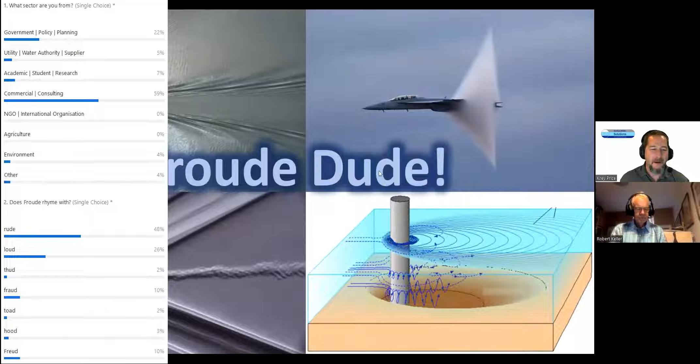So I guess one of the things I did want to mention about the poll results: first, the pronunciation of Froude - is it Froude as in rude, or Froude as in loud, thud, fraud, toad, hood or Freud?

It looks like most people are going to say Froude. That's how we pronounce it today, but we do have a Frenchman on board who may pronounce things a little bit differently. Also, I wanted to get a feel for whether you're familiar with a lot of the terms we'll be covering in this webinar and some upcoming webinars.

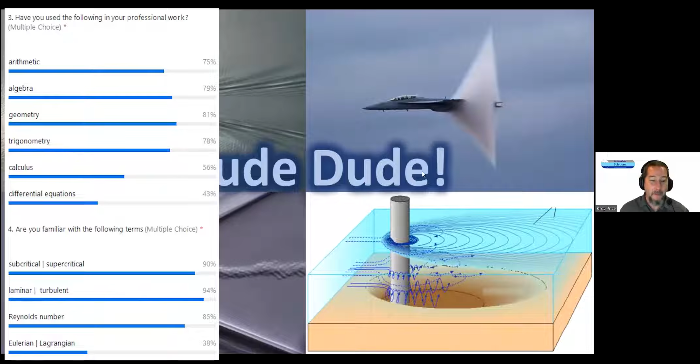It looks like there's some pretty good coverage of those terms, and a lot of people have actually used some of their math skills in their work, which is more than I thought - people are actually using calculus in their work. I have to admit, it's been 20 years of water modeling, and I have not yet done a differential equation.

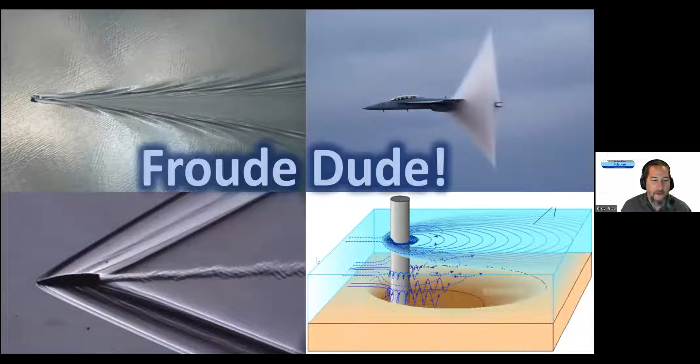So let's dive straight into our topic for today, which is Froude and the Froude number. Now I've got a few analogies shown here: a ship wake, and we'll hear from Hubert momentarily about how Froude was actually a naval architect, and how a ship moving through water behaves like a bullet moving through the air or a supersonic jet, and how that all relates to a bridge pier and a moving medium.

So we've got sometimes mediums that move, and sometimes it's the object that moves within the medium. What we're doing with this topic today is introducing one concept, the Froude number, but we're trying to give you a feel for how our upcoming courses in May and June are going to play out. We're going to address a whole lot of different terms in those courses, and take them all back to first principles.

How does water behave, like Newton's experiments here, and momentum and energy? How does gravity come into play? Hubert will mention in our equation today, you'll see gravity in there. What would happen if you took some of these models out into space? If you've seen the movie Passengers, they studied this intensely as far as how water would behave without gravity, and they used some of the International Space Station experiments to see how surface tension would keep it together.

And what would happen if you took your model out into space and then put it into a space elevator and accelerated it at 9.8 meters per second squared - it's the same thing as you would have here on planet Earth. So we're going to try and take all these things back to basics, to first principles.

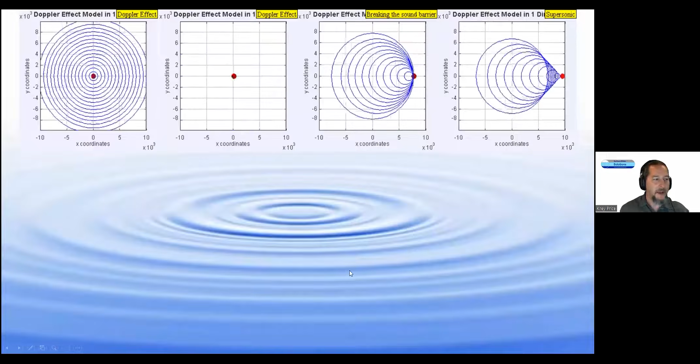And one of the things we're also going to talk about a little bit today is analogies. These are Wikipedia animations from the Doppler effect, and we all know that has to do with sound. But what does this have to do with water? Well, if you imagine a ripple of water and how fast that ripple travels, that's what we're talking about today.

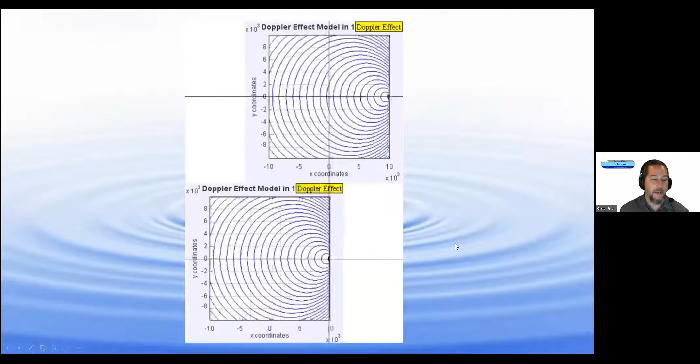And so if I took that same Doppler effect, and instead of moving the object through the medium, I keep the object where it is and move the medium around that object, it really ends up being the same thing, and your perspective can come into play there as well.

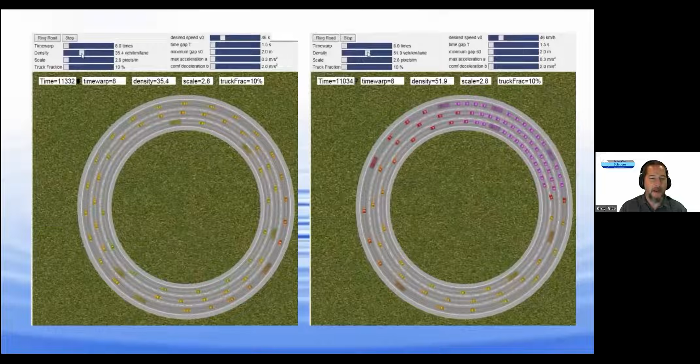Now, we all have analogies every day that we deal with. Are we dealing with subcritical or supercritical flow on the road? Are you guided by just the traffic around you? Is this laminar flow? Is it turbulent? Are you dealing with backwater effects and waves from the brake lights that move up towards you? There are analogous systems all over the place.

One of the ones that's most familiar - and we'll hear from Hubert about some weirs out there where we have some supercritical flow - which direction can information move in? Can this fellow who's trapped in this vortex splash a message up to somebody standing up on shore here and send a wave upstream?

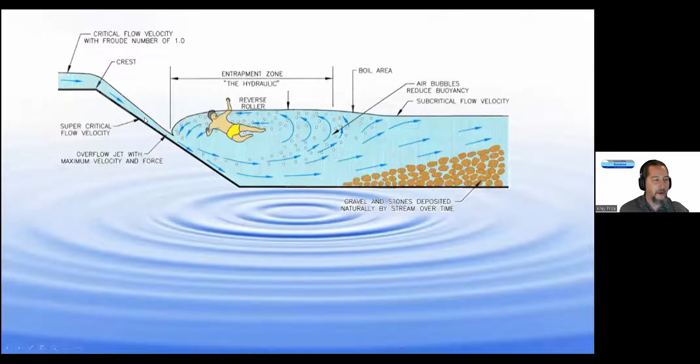That's what we're going to talk about today: which direction can information travel in?

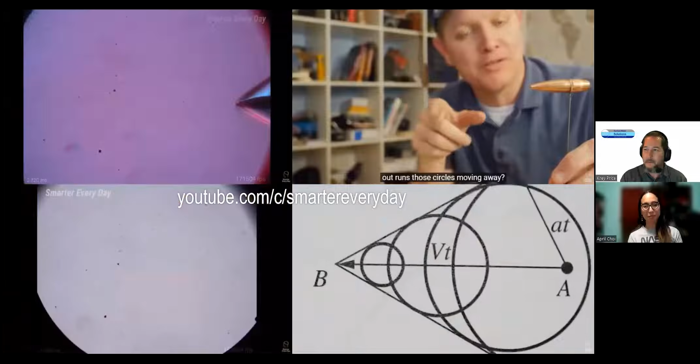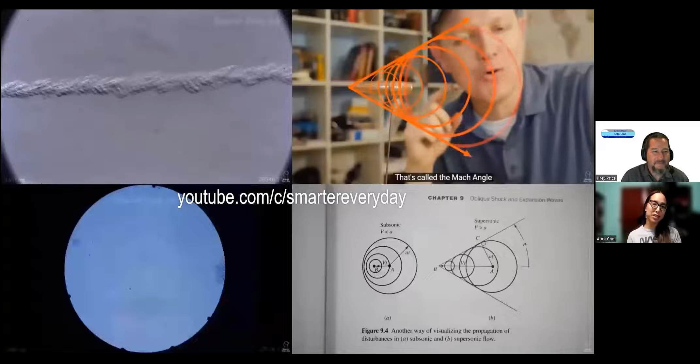So we got two episodes, one about bullets in the air and another about whip cracking. I had the wonderful opportunity to work on an experiment with Destin from Smarter Every Day on Schlieren imaging, which is specifically how you view pressure variations in the air, using a technique developed by Toepler, where you can see the densities of the air translate.

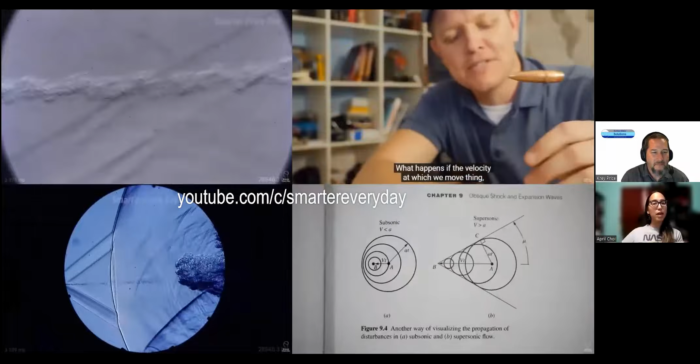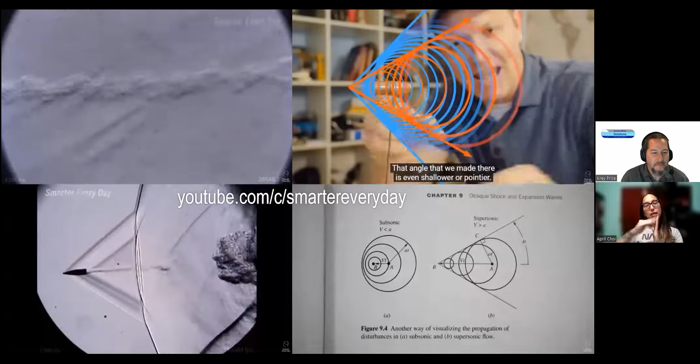As Kray was saying earlier, you have a natural propagation of pressure waves that would occur in water as it oscillates up and down, or as sound travels away from an object in a medium of air. In the instance of a bullet, we have something referred to as the Mach number, similar to the Froude number, in the idea that once you reach a certain point—in this case 1, since it's a dimensionless number—there's an amount of propagation that can occur forward as well as sideways.

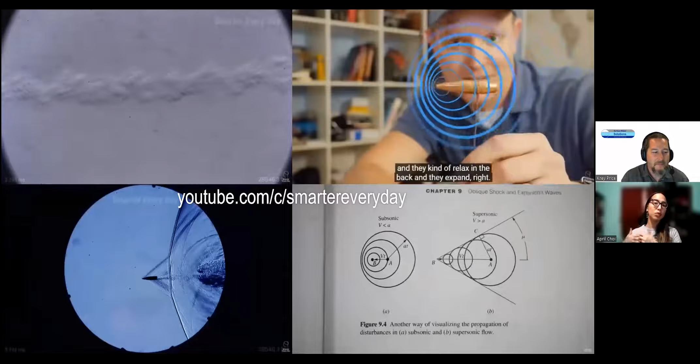As these waves try to propagate sideways, or up and down in the visual frame of reference, you can see in the lower left that a supersonic bullet will actually travel faster than the propagating wave that travels at the natural speed of sound. This is how you get that supercriticality, or a Mach number higher than 1.

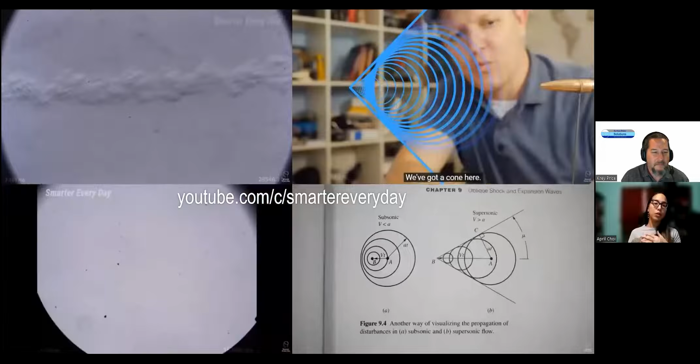In the lower right-hand corner, you can see what happens when you go from a transonic flow, which allows some areas to be supersonic and some not, to breaking the sound barrier, what a lot of people refer to, creating this Mach angle coming away from the tip of a bullet.

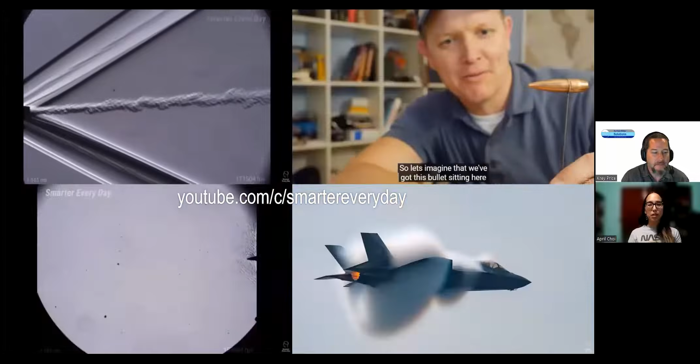So I flew down to Mississippi to help with imaging, where you can see the flow of a bullet through air, and then my big passion in whip cracking also got utilized to be able to actually see the development of a shockwave coming off of a whip.

We actually got to see the wave propagation down the whip, as well as using that Schlieren imaging I spoke of to see the bow shock development coming off of that whip, so you can see how that whip is moving.

One thing we also got to see was the different pressure variations, actually seeing the development of a denser air bow shock in the front, as well as dissipating toward the back end.

This was an incredibly fun experiment, where we also talked about the Eulerian-Lagrangian framework—whether you take the framework and look at the object you're tracking. So if you were just standing looking at a bullet, for example, versus driving in a car in traffic, versus standing on a bridge pier watching traffic flow below you, it concentrates on whether you're the object itself or the flow field around you.

So one question for you: when I'm at the gym and I use the battle ropes, how come those don't crack?

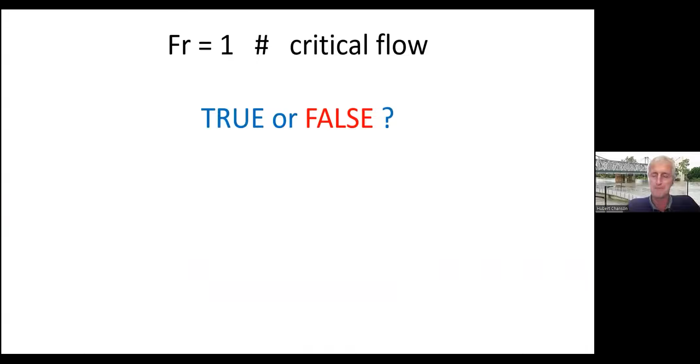So I will start by asking you two questions. The Froude number equal unity means critical flow condition, true or false? And the Froude number is derived from energy considerations, true or false? Think about it, and we'll come back to this question at the end of my talk.

The Froude number is a dimensionless number that is linked to gravity effect and is often defined as the ratio of the velocity scale divided by the square root of gravity acceleration times length scale. It is named after an Englishman, William Froude, who used this dimensionless number in the 1870s.

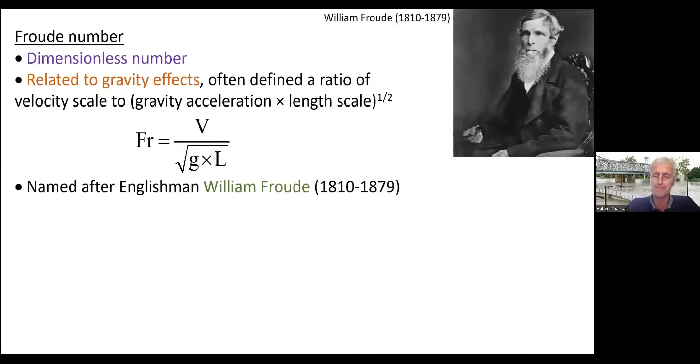But in fact the dimensionless number was first introduced by a Frenchman, Ferdinand Reech, who was a French naval academic, and used this dimensionless number for the testing of ships and propellers, introduced first in his lecture notes in 1832 and later published in 1852.

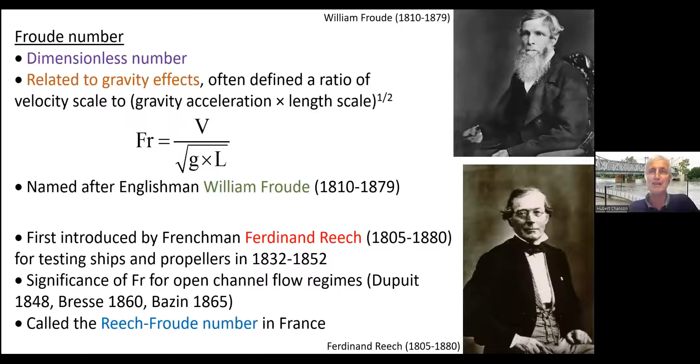Interestingly, about the same time, a number of hydraulic scholars in France recognized the significance of this dimensionless number in relation to the various open channel flow regimes. And in France, many textbooks refer to this number as the Reech-Froude number. Indeed, when I was taught at university, I was taught about the Reech-Froude number.

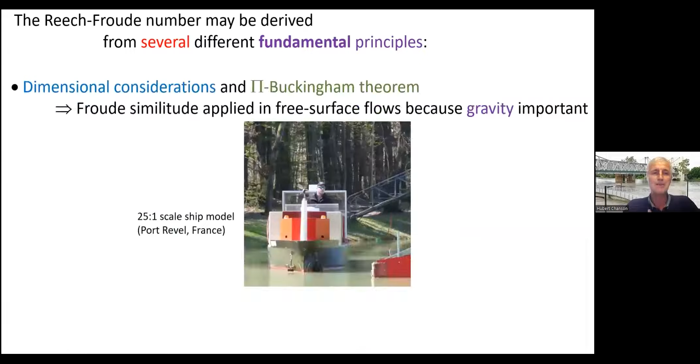Maybe first, one of the key takeaway messages this morning: the Reech-Froude number may be derived from several different fundamental principles, all of which are theoretically correct. It may be derived based upon dimensional consideration, using, for example, the Pi-Buckingham theorem, because gravity effects are always important when modeling free surface flow.

You see in front of you a picture of a 25:1 ship scale model. Don't be fooled by the scale, this ship model still weighs between 5 to 8 tons. We may also express the specific energy in a dimensionless form and derive critical flow condition for minimum specific energy, following the work of Boris Bakhmetev.

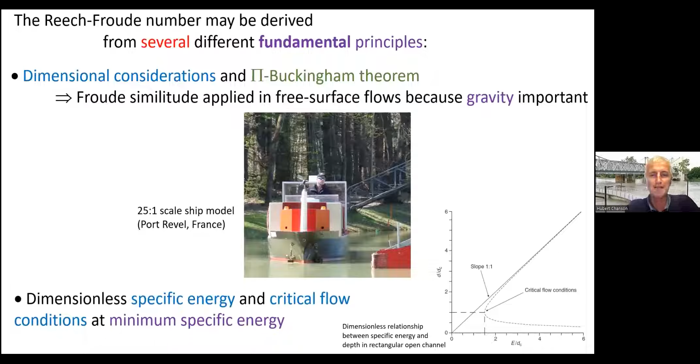We may also derive the Reech-Froude number from momentum considerations, either from an integral form, such as the Bélanger equation, or from a differential form, such as the Navier-Stokes equation. The Bélanger equation applies to hydraulic jump in horizontal, smooth, rectangular prismatic channels, and was first derived in 1841 by another Frenchman, Jean-Baptiste Bélanger.

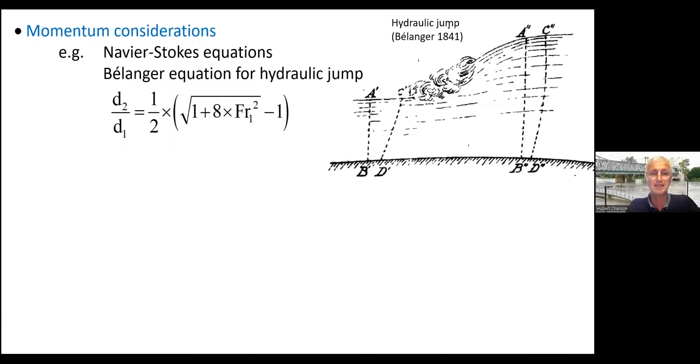We may equally derive the Reech-Froude number based upon energy considerations, either in an integral form or in a differential form. Many of us today will be familiar with the differential form of the energy equation, called the backwater equation.

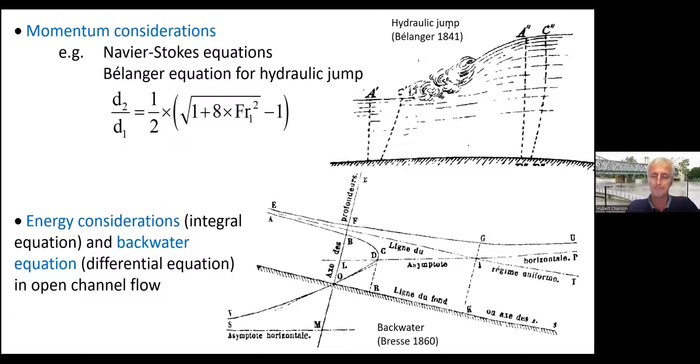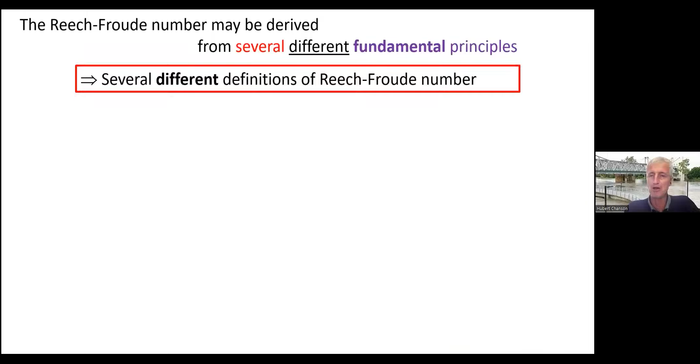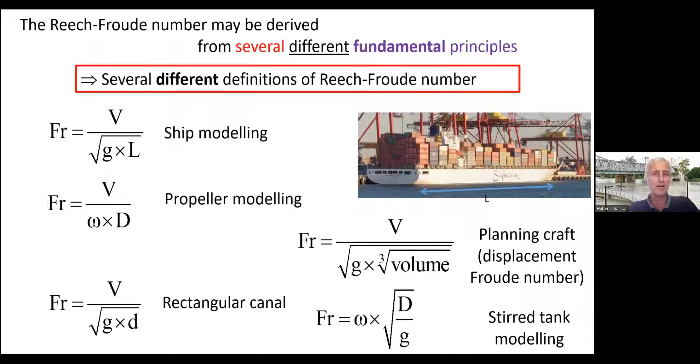Maybe the second key takeaway message today is that since the Froude number can be derived from several different correct theoretical considerations, there are in turn several different definitions of the Froude number. In front of you are 5 different definitions, and I know at least 3 to 4 other definitions. So as hydraulic engineers and fluid modelers, we need to ask ourselves, which one is correct? Which one should we use? How do we define the Froude number?

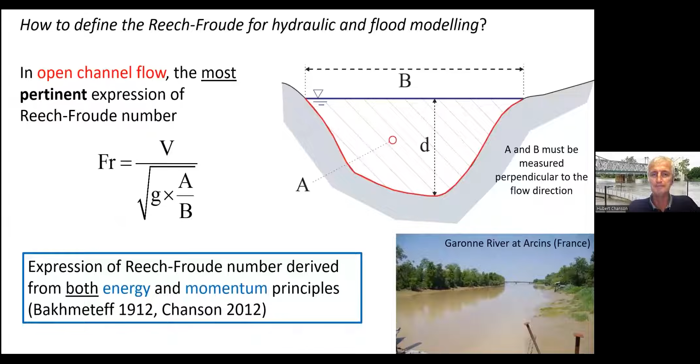Interestingly, this definition can be derived from both energy and momentum principles. With this definition, and only with this definition, the Froude number equals unity at critical flow conditions, when D equals Dc, the water depth being equal to the critical depth.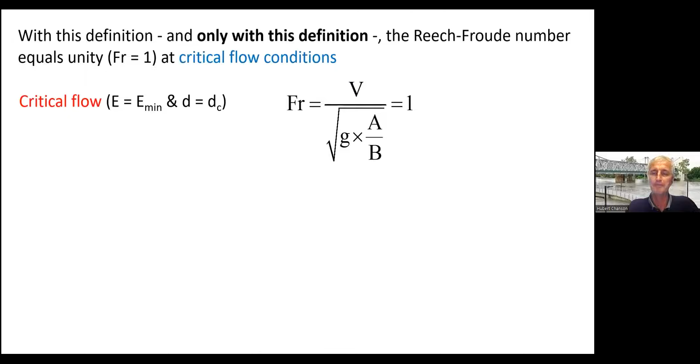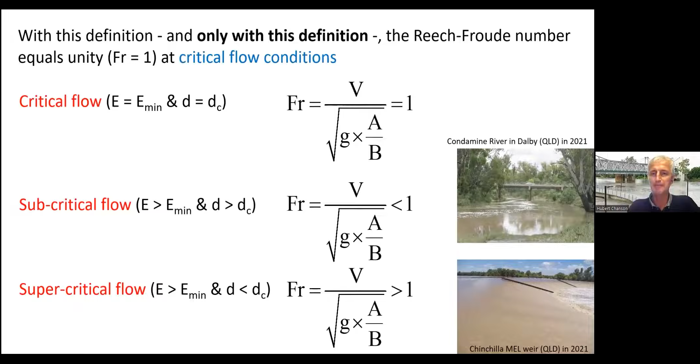When the water depth is greater than the critical depth, that is when we have subcritical flow, this Froude number definition will be less than unity. And when the water depth is less than the critical depth, that is supercritical flow, this Froude number will be greater than 1. The concepts of critical, subcritical, and supercritical flow are essential in open channel hydraulics.

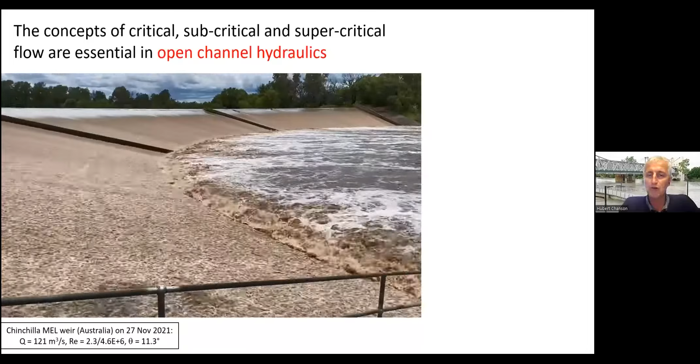I'm playing a video, and I hope you can see it, of a spillway operation in November last year in Queensland, with subcritical flow in the tailwater condition, a hydraulic jump, supercritical flow down the steep chute, and critical flow condition at the spillway crest.

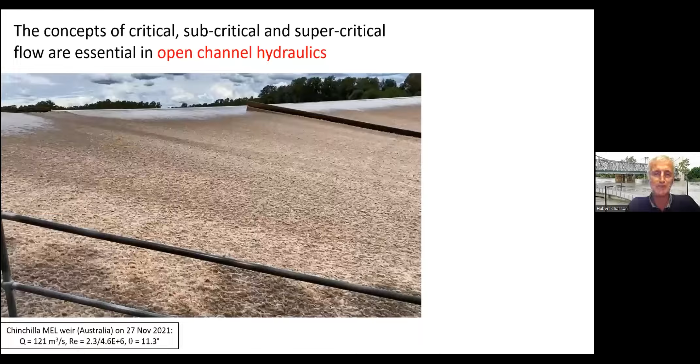This particular video was observed at the beginning of the flood. Two weeks later, this dam was completely overtopped, and on the right, the two photographs illustrate the high water level, and my car would have been completely submerged at the time.

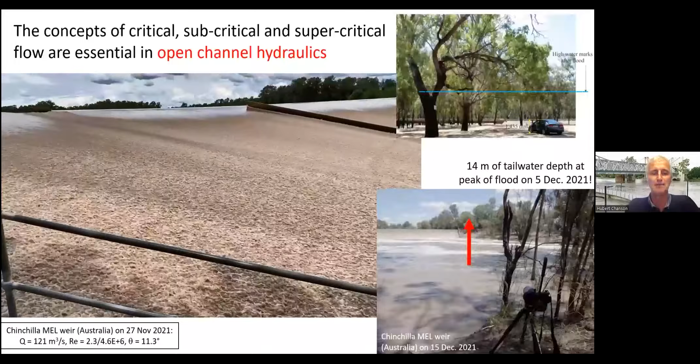So coming back to the two key questions at the start of this talk: does a Froude number equal to 1 mean critical flow condition, true or false? The answer is false, unless we use a definition of the Froude number as shown here, using the ratio A over B as a characteristic length scale.

The Froude number is derived from energy consideration, true or false? I will say partially true, because we can derive the Froude number from momentum consideration as well as dimensional consideration.

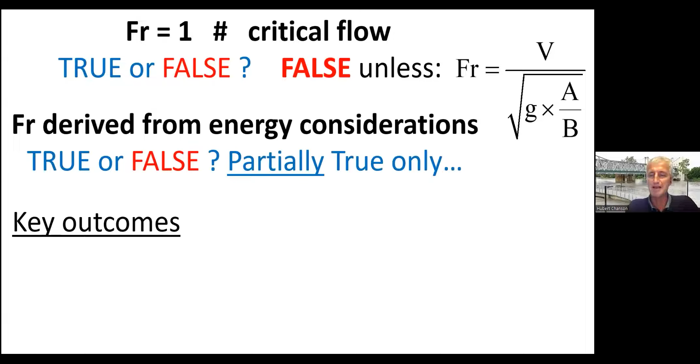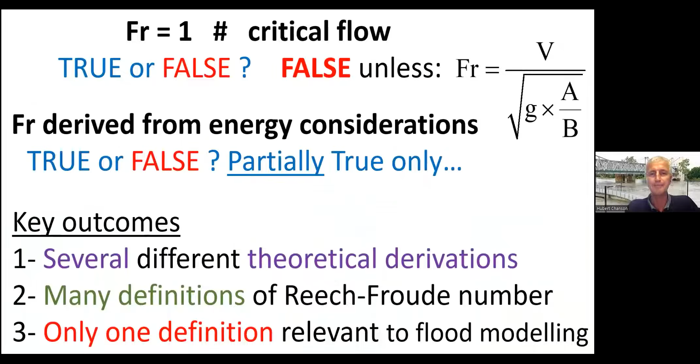For those interested, there is a number of bibliography references that you may wish to check. Thank you very much.

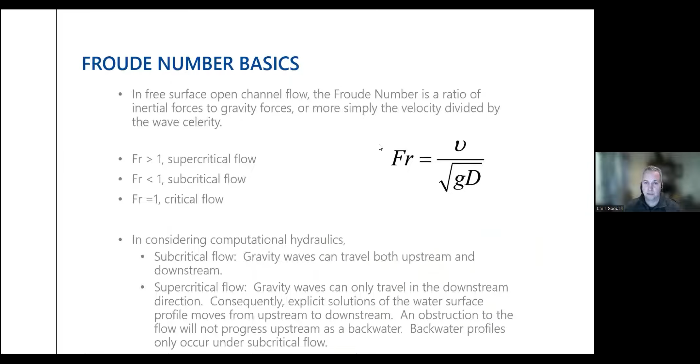In stream modeling of natural streams, we generally don't think about the Froude number too much. That's because most natural streams flow under a subcritical flow regime. However, understanding Froude numbers and noticing when they get close to 1 or even greater than 1 in your results can indicate problems with your modeling inputs.

N values may be too low, which could drive your depths down below critical depth into the supercritical realm when maybe it shouldn't be there. Computation nodes may be too far apart, either your cross sections are spaced too far apart, or in a two-dimensional model your cells are too big. High Courant numbers can also indicate velocities are too high, and Froude numbers are too high as well.

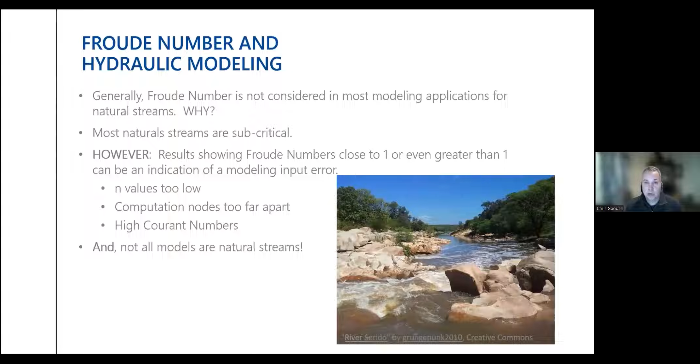But not all models we do in hydraulic engineering are natural streams. We get into constructed channels as well, which I'll talk about in just a second.

But why should we care about the Froude number when doing hydraulic modeling or design? I think it gives a better understanding of the conditions you're modeling, helps you interpret your results better, and can help verify whether your model is representing reality.

Model stability as well. If you've been doing unsteady flow computations, whether 1D or 2D, you know the acceleration terms can be very sensitive when your Froude numbers get close to 1 or even greater than 1, and that can require additional measures in your modeling to make sure your model doesn't blow up on you.

When talking about design, the Froude number can really help you determine the expected turbulence you might have in a hydraulic jump and stilling basin design.

It can give you an indication of how much uncertainty you may have in your results. It can also help determine the required wall or bank heights needed to pass flow safely without overtopping the banks. Anytime you have Froude numbers that are really high, greater than 1, scour should definitely be a consideration, because high Froude numbers tend to erode alluvial streams.

There are also considerations for supercritically designed channels, and those do occur. You have steep slopes and need to get rid of the water as quickly and efficiently as possible, so you may design it as a supercritical channel.

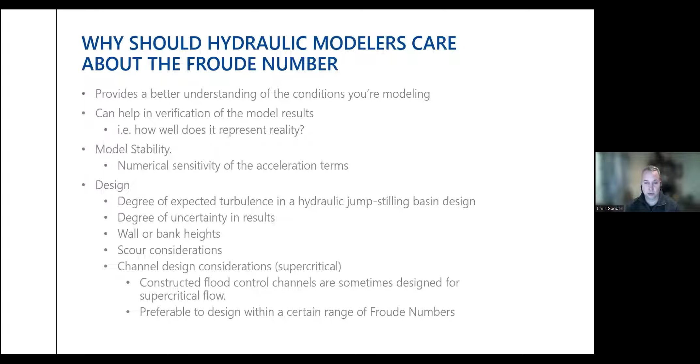Research done by the Army Engineer Research and Development Center, ERDC, in Mississippi, suggests that for supercritical channels, you want to try to get your Froude numbers between 1.13 and 2 for optimal conditions.

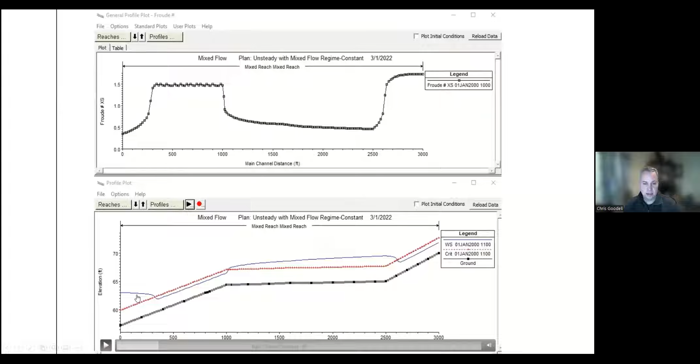You can see that we've got a subcritical realm right here. It's still supercritical, and notice that this is not translating up through the supercritical reach until this continues to grow higher and higher. So as we progress through, you can see the downstream disturbance is getting higher. It's forcing everything into subcritical, and then we lower it back down and we come back to the original profile.

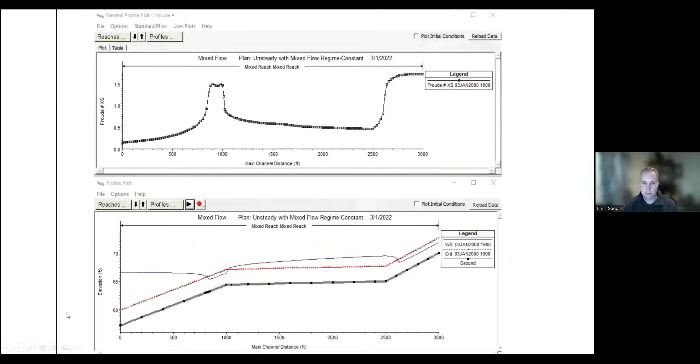Now, one consideration where you would want to think about Froude numbers is the design of bridges, because depending on the regime you're in, whether you're supercritical or subcritical, it can have different effects on what's happening inside of the bridge.

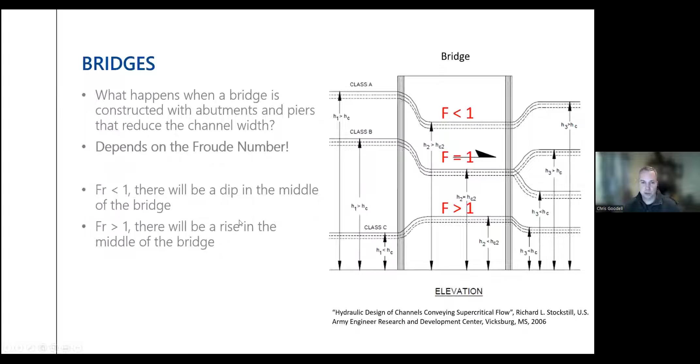I mentioned earlier that the Froude number can give you an indication of whether or not you have bad input data. Let's take, for example, we have a natural stream, but we put in an N value that's more characteristic of a concrete constructed channel. We might have water that shows up as supercritical.

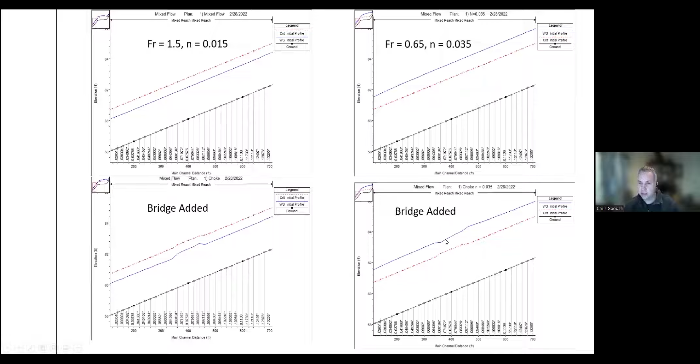And this is why when we put in a bridge, we typically see a rise and a backwater effect upstream. Consequently, if we have this bridge in here and we take it out, this dip will go away and you actually get a localized rise in the water surface for removing or widening a bridge.

Here's another example of a hydraulic jump coming through a bridge. In this case, this is a two-dimensional model. Up on the top, we have our Froude number plotted upstream to downstream. Here you can see we start out with a Froude number around 2, and then it jumps. We have a hydraulic jump, so it lowers into the subcritical realm below 1, and then it transitions back into the supercritical downstream.

In the water surface plot, you can clearly see where the hydraulic jump takes place and where that drawdown occurs to come back to the normal depth conditions. Here in the plan view of this bridge, you can see the abutments right here, and this gives you an indication that the hydraulic jump is not very uniform when considering the changes laterally in this channel.

You can see that the jump happens further upstream on the sides, on the periphery of the channel, than in the center. It takes a little bit longer to resolve itself in the center than it does on the sides here.

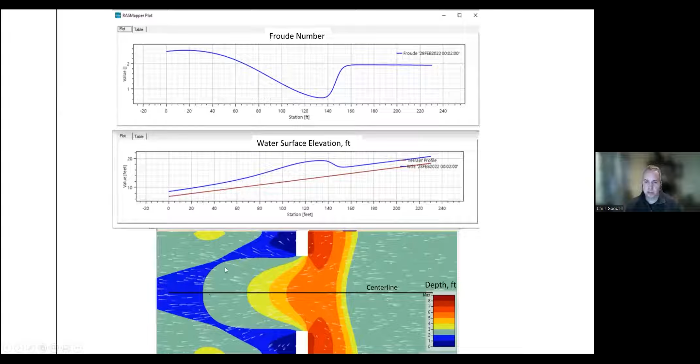Another consideration for Froude numbers, if you ever get into the design of energy dissipation structures, the Froude number is very important because it gives you an indication of not only what the length of your hydraulic jump will be, but also the characteristics, the amount of turbulence you might see, and also the change in sequent depths from the upstream supercritical regime to the downstream subcritical regime.

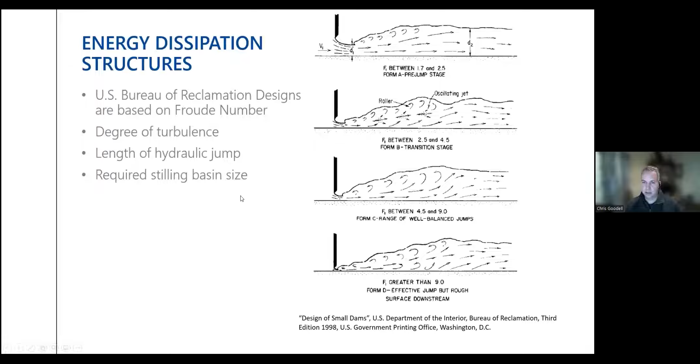Notice here with a Froude number greater than 9, we have a very shallow depth, very, very high velocities, and a very turbulent jump into low velocities and greater depth. So this is something you would certainly want to consider when designing wall heights for a stilling basin, as well as the overall size and energy dissipation elements you might put into it.

This is a figure right out of the Bureau of Reclamation's design of small dams, which has some different types of stilling basins you might use, or at least start out with for your design, depending on the Froude number that you have at the toe of the spillway.

Here we have the spillway here. This is the stilling basin, which is meant to induce a hydraulic jump in a protected, armored section before delivering the flow downstream to the natural alluvium, where high velocities and high Froude numbers would tend to erode this material. So we want to keep the jump contained.

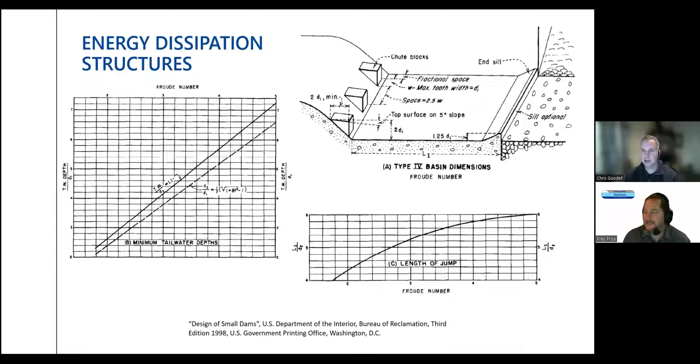That's why it's important to know the length of the jump, and the Froude number helps us to determine that, as well as how deep we need to make this stilling basin in relation to the downstream river. So those are just a few considerations in practice where you may want to use the Froude number. There are many more we don't have time to get to, but we'll get to that in the follow-up course. So back to you, Krey.

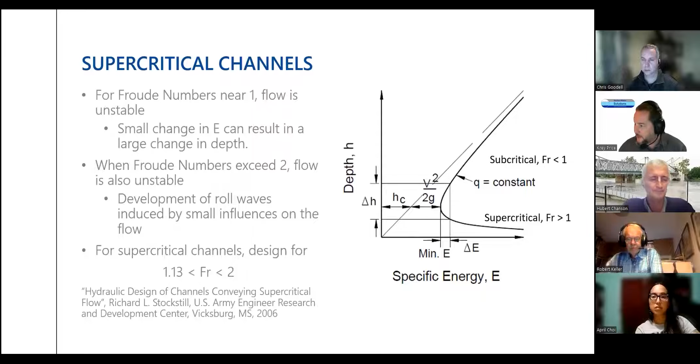One of the questions I'll ask here, and I think we'll start with Bob maybe for a response and then go to Hubert since you've answered this one already online. The question is, just wondering what a good way is to understand specific energy. So maybe we'll start with Bob and then go over to Hubert on this one. Looking at the specific energy plot here, are there any concepts you've used in the past to explain this in your university lectures that help this sink in to somebody who's new to the concept of specific energy?

Yeah, okay. Specific energy is defined as the total energy relative to the bed. So it's the height of the total energy line above the bed level. I think looking at this diagram is a very good way to understand, and Chris did bring this out, that when you get near critical flow, which would be the nose of the curve, you have a rate of change of specific energy that is very small, but the depth increases rapidly for a very small change in specific energy. So that means that if you're near critical flow, it just takes a small change in bed elevation to flip you from supercritical to subcritical, and hence give the large standing waves that are sometimes a feature of what we see, especially in some natural channels.

But the one thing I did want to bring out is that we talk about critical flow as being something to be avoided. But if we have a look at the equation for critical flow, and it's not on the board, so just take it as fact from me if you're prepared to do that, the Froude number actually gives you a relationship between measured water surface elevation and flow rate. So if we can generate critical flow in a safe way, we can do that with things like long-throated flumes, and also with a weir flow, a broad-crested weir.

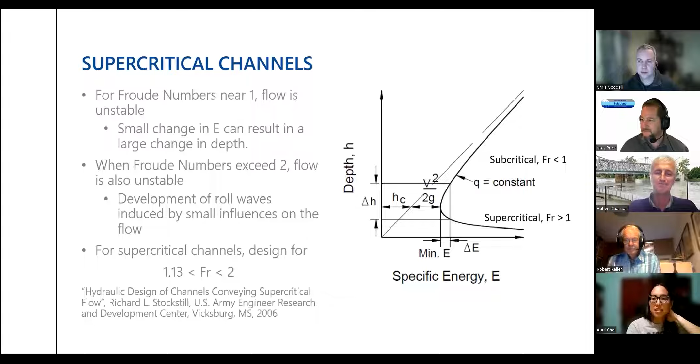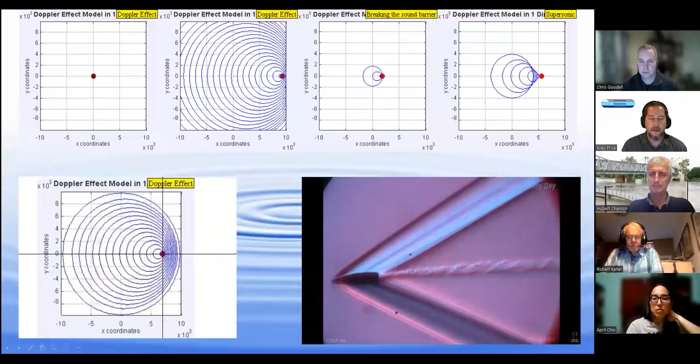What I'll do - there was another question asking what is a good analogy to explain to a non-engineer, non-modeler how the Froude number works. I think Bob said it perfectly there. I think everybody can picture hearing a sonic boom as a plane goes by, where it's exceeding the speed of sound.

And I guess that's the reason we've brought April and others on here, because that's a real world example that might be easier to picture. So again, if this was the Doppler effect with sound in the air, and if you imagine this being a rock dropped in the water, the speed of the water going, the wave celerity versus the velocity of the water next to you - really it's just a ratio.

People say, hey, that plane was going Mach 2 or Mach 3, but we don't really translate that into our flow and say, look at that river or channel, it's going Froude 2 or Froude 3, but it's really the same thing. It's the ratio of the celerity of the wave, the information within the medium, to the ripple - the ratio of that wave moving to the speed of the water.

And so if that water is going twice as fast as the ripples can go, like you see over here on the right, if it's going twice as fast as those ripples can move, then that might be a Froude 2. So I think the Mach number is generally a good analogy for that, and it's something that's been brought up a number of times.

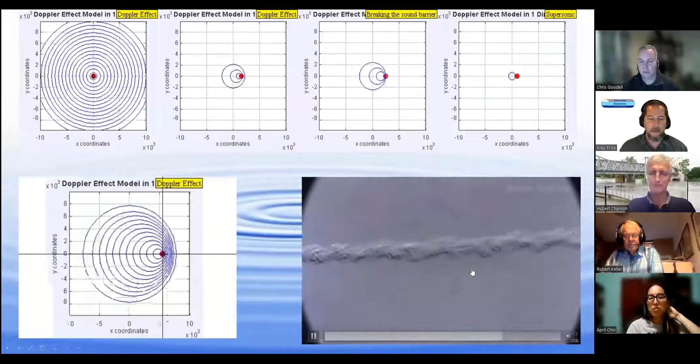I'd be curious, April, if you wanted to mention a little bit about this - a question I actually looked up and tried to find the answer to. Does the space shuttle or other boosters or rockets punch through the sound barrier on their way straight up? And if so, do you have some of those same issues going up versus - you always picture a sonic boom coming from a plane going sideways, but rockets I think push through it very quickly as well. Is that something you're involved in in your own professional work?

I'm not directly involved in the fluid dynamics of the rocket pushing forward, but I do know that they exceed Mach 1 very quickly. And then there's also a point known as max Q, which is the point of highest dynamic pressure. That's kind of the point, as people were saying earlier, that we worry about the most and hope that the vehicle doesn't disintegrate anytime soon. Yeah, exactly.

Because when you do have a standing wave, if you toss a rock into water that's moving at critical velocity, you would have a standing wave right where that rock hit. The same thing can happen as a plane is trying to punch through the sound barrier. It all kind of stacks up.

What was interesting about those videos that April was involved in is that it showed that even something moving subsonically has elements and things around it that move supersonically. There's a bunch of particles around it, and that can happen in your hydraulic structure as well. When you fix a hydraulic structure and move something around it subcritically, there can be supercritical pieces that pop up, because relative to your frame of reference, you might have things punching through critical flow, or in the case of a bullet, little pieces around it that go supersonic.